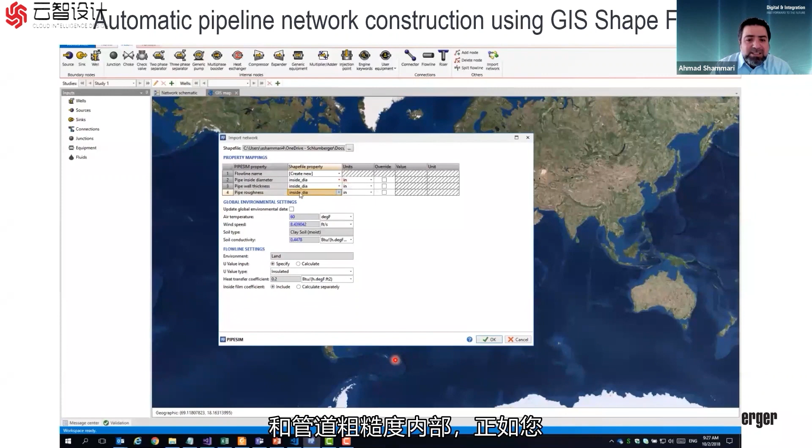So now it found that the shapefile has certain attributes, we call it. So we have pipe inside diameter, pipe wall thickness, and pipe roughness. So as you can see here, I need to override because the property is not available. So now what will happen is that it actually constructed my 2D network. And all these are new flow lines generated automatically from the shapefile.

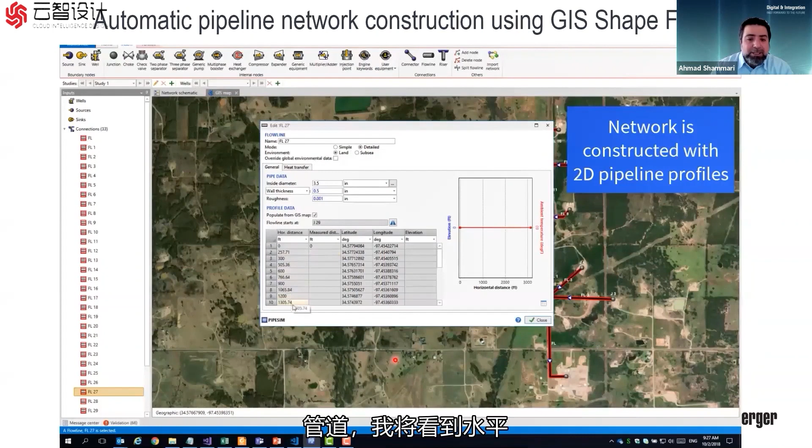If I double click on the pipeline, I will see the horizontal distance, the latitude and the longitude, but I'm still missing the measured distance and the elevation. How can I import that? How can I generate that? Well, I can simply go to capture elevation.

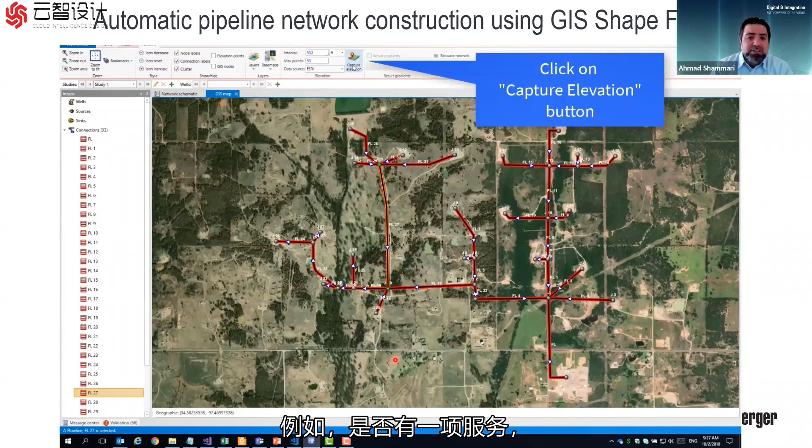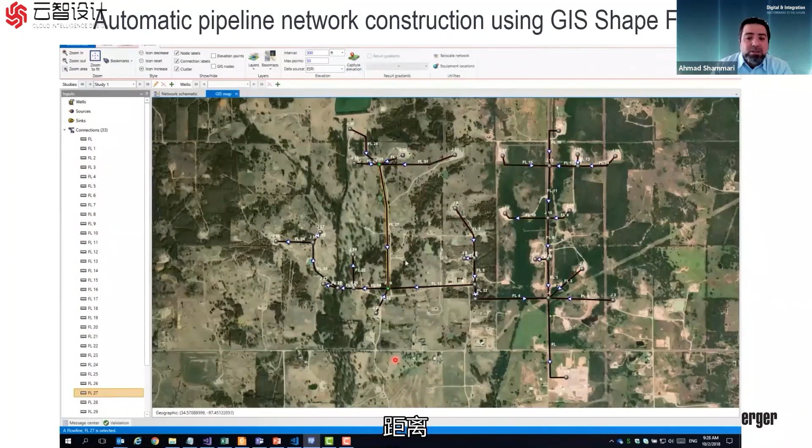So automatically, when I click on capture elevation, PipeSim will go to, for example, the Esri service. As you can see, data source is Esri, and it will find the pipeline profiles automatically from the internet. And this is free for all PipeSim users. Okay. As you can see here, now the elevation has been captured and also the distance. And all the red colors now are gone.

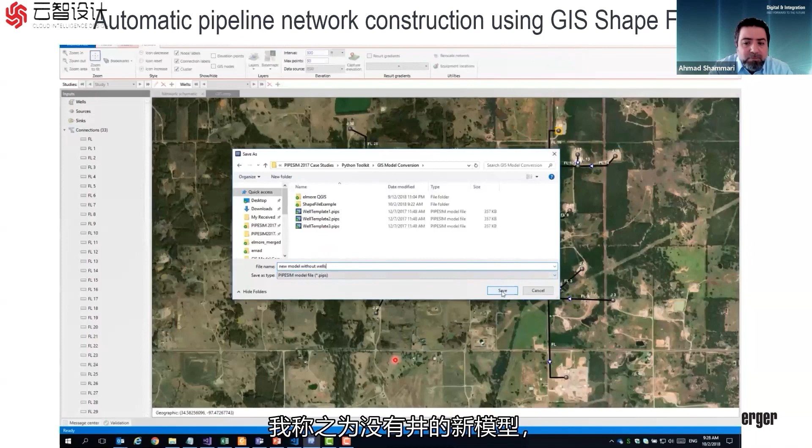However, pipelines are not connected to wells yet, right? Because the shapefile just has the start and the end of the pipelines. So now I'm going to save this network model, and I call it new model without wells. Okay. So now, as you can see here, I don't have wells. It's just pipelines. And now I have a network that contains only pipelines without wells.

Okay. Next, I will show you the magic now. I'm going to automatically build well models using Python script from Excel. And then I'm going also to update the network model that I just created. And at all the beginnings of the pipelines, I'm going to place wells there. And all that without touching the user interface. Okay, let me do that.

Sorry. Here we go. Sorry.

So we have already developed a Python script for this purpose. So I have a Python script that will build well models from data in Excel. Okay. This script is launched through PipeSim using PipeSim Python plugin in Excel. This is the data, okay?

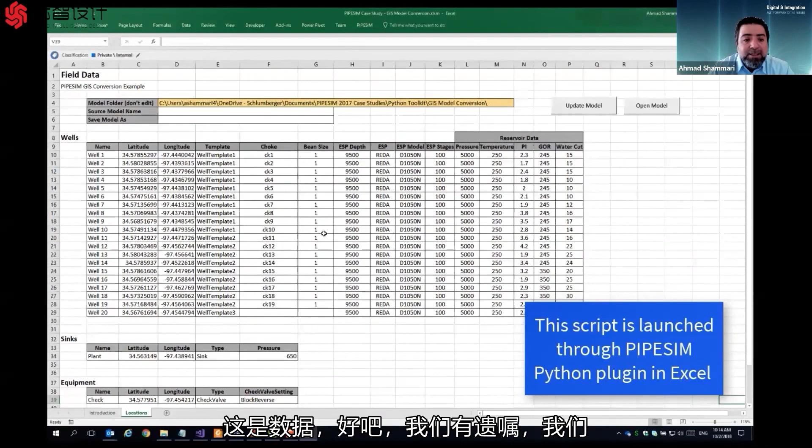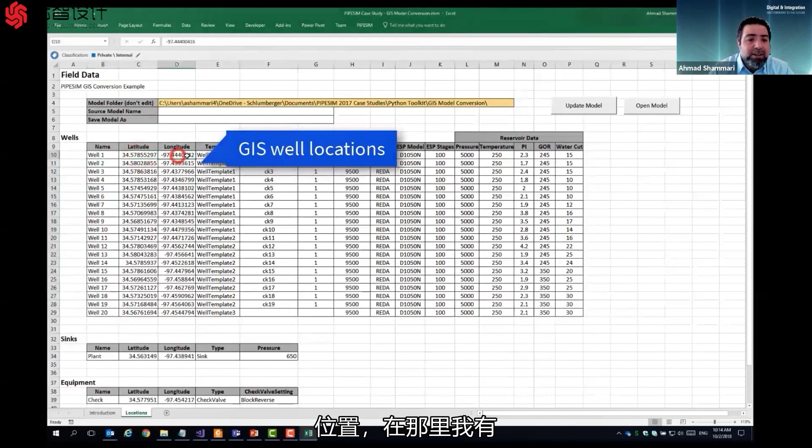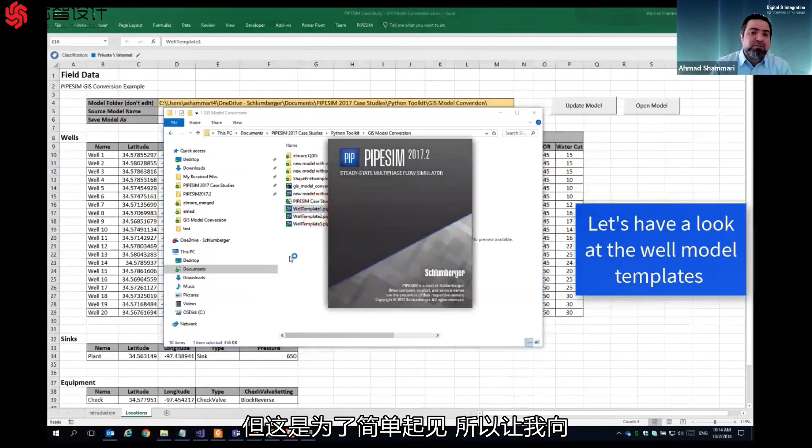We have 20 wells that I'm going to build from scratch. I'm going to place them in this GIS location where I have the latitude, the longitude. I will use well templates, starting with well templates, and I'm going to update the data. Of course, this is not necessary, but this is for simplicity. So let me just show you the template. This template has already some data, some casing, tubing, completion, etc.

So what I'm going to do is update each of the templates with data and then store it in the GIS location into my network model that I built in the previous slide. Okay. So I'm going to add electric submersible pumps. So these are the ESP properties.

I'm sorry, it's a bit. So yeah, let me just, 1 second.

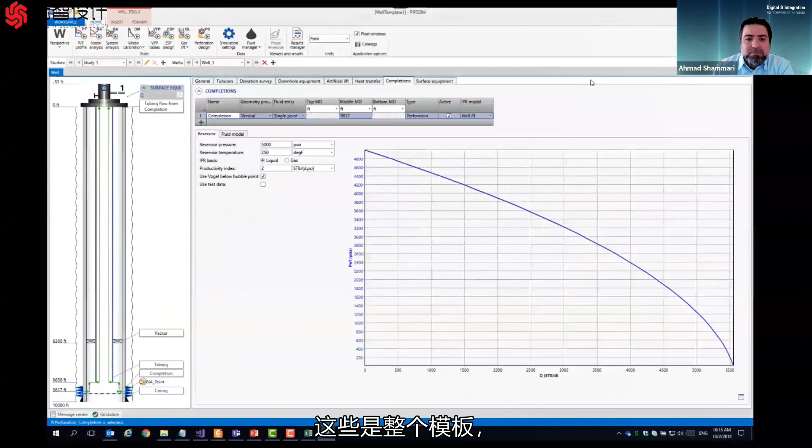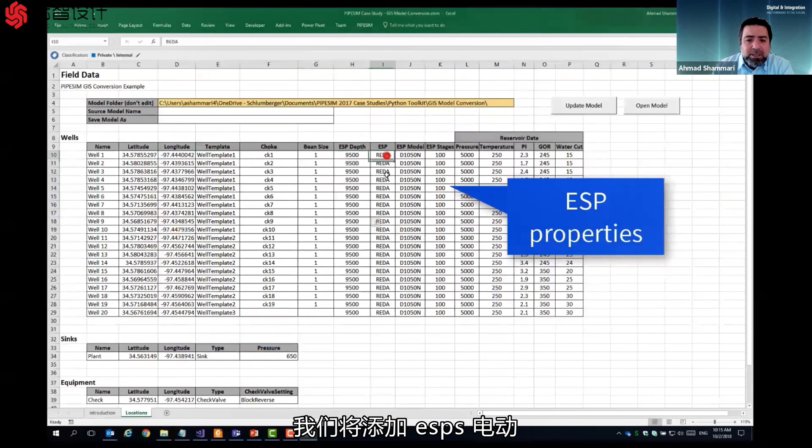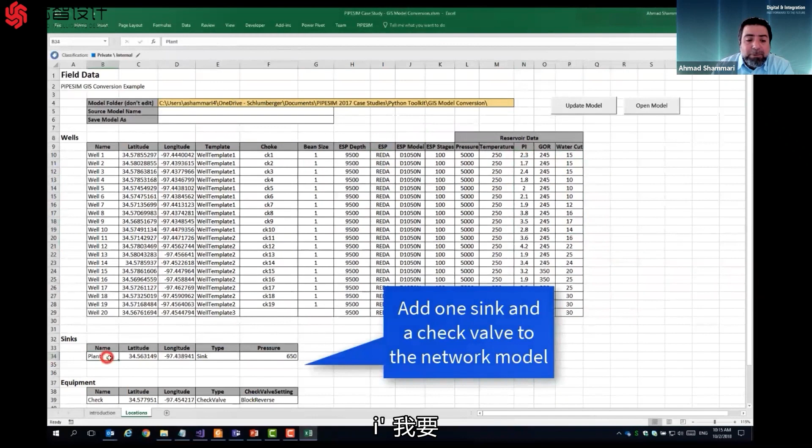So these are the well templates. And now we have 3 templates. We are going to add ESPs, electric submersible pumps. I'm going to change the phase ratio for the IPRs. I will keep the pressures. I'm going to add a plant as a sink in this location, and I'm going to add a check valve in this location. Now, let me just show you the script.

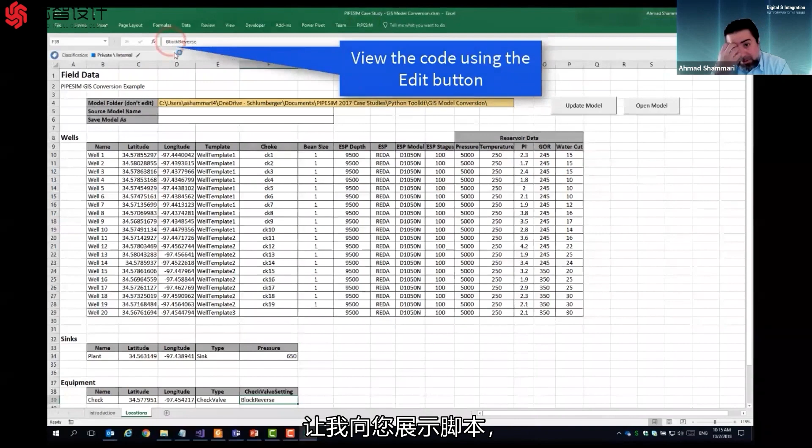So this is the script that is developed to build the models from scratch. Now, we are going to insert the original model name. So this is, as you remember, new model without wells. And then I'm going to save it in a new name. I'm going to call it with wells, okay? This is the saved model.

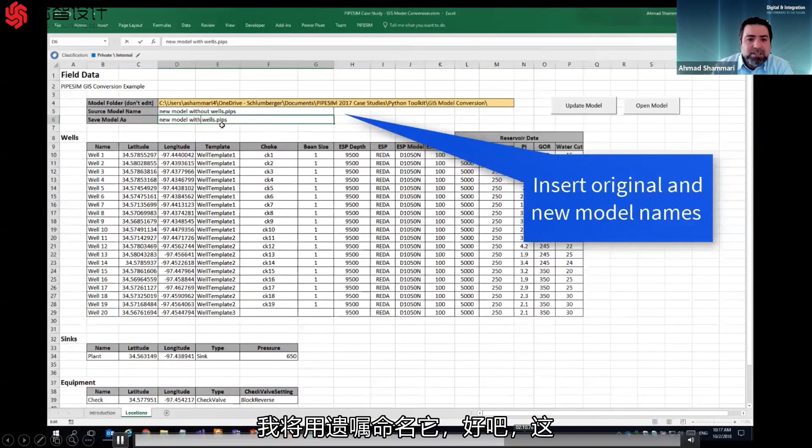And now I click on this button that will launch everything in the background. And after a few seconds, the new model is launched.

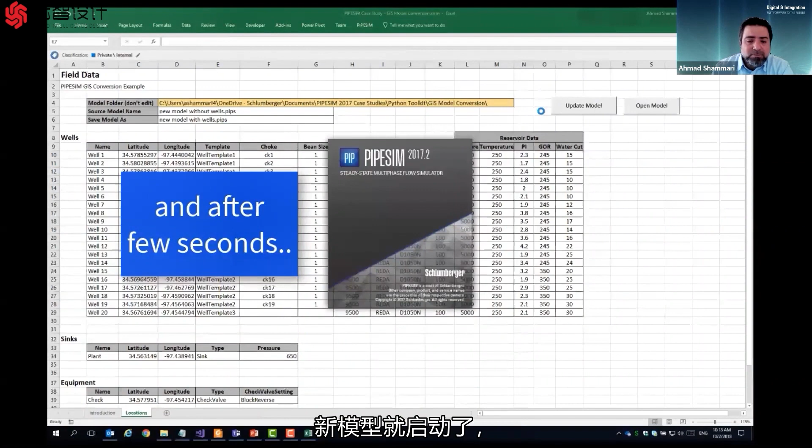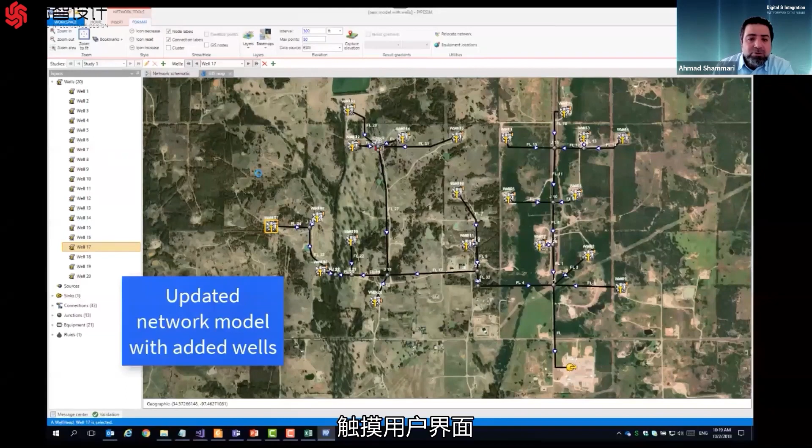And as you will see now, all the wells have been added automatically without me touching the user interface. All the data came from Excel, right? ESPs have been added. Each well is placed in the right location because I defined the UTM coordinates, the latitude and the longitude.

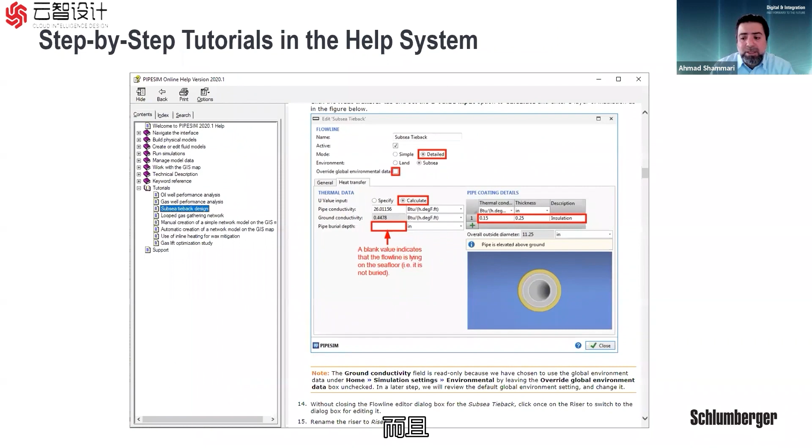So let me ask Nikhil and Charter, do we have time so that I can do a live demo, or that's it? Yes, sir, sure. We have a lot of time. You can go. Perfect. Okay. Before I go to the demo, anybody has a question? Do you want to type the question in the chat, or we can take live questions? What we can do, sir, if anyone has any question, they can raise their hand and we will unmute them and they can directly ask questions with you. Okay. So ladies and gentlemen, if you have a question, you can raise your hand through Zoom, and then we can take it. Otherwise, if you have no questions, I can launch PipeSim now.

Okay, Mr. Ali, you can go ahead. You can ask your question. Yeah, go ahead, please, Ali. Hi, thank you very much for this great presentation. I would like to know the sort of differences or similarities. I see now the similarities between this and the PETEX software. We have, from the PETEX package, Prosper, GAP. I see there are quite a lot of similarities. What would you say is the difference in PipeSim from those packages?

Sure. So number one, PipeSim has the GIS integration. Okay. I don't think it's right that I criticize or show any weakness of any other product for a competitor. Let me tell you the things that PipeSim has, and then you can find out yourself whether the other competitor has it or not. So number one, PipeSim has the GIS integration, where you can run models, you can look into the results gradient along the GIS. You can build networks automatically from the GIS and so on. So this is a very important feature.

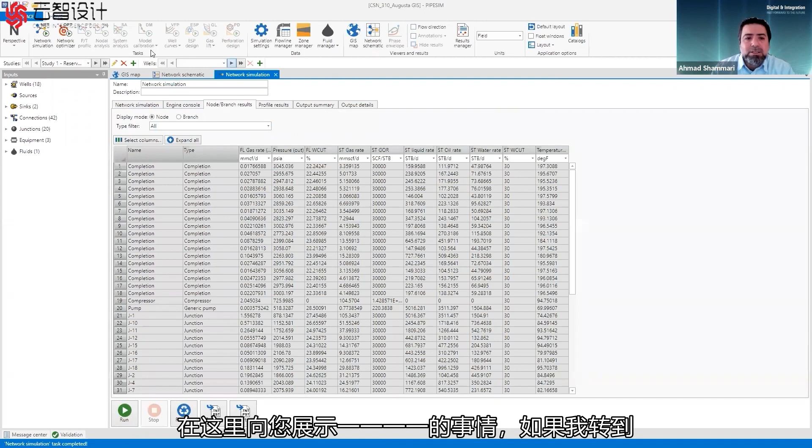We also have our PipeSim network optimizer, which is unique. So in the network simulator, let me just show you one thing here. If I go to the GIS map and then go to format, as you can see here, this is the results gradient. One more important thing that PipeSim is unique about is that the whole network is modeled in the same model. You don't have a separate software for the wells, another software for the network. So if you want to model a well, it's in the same model. You can double click on it right away, and it will open for you all the well simulation capabilities, literally everything.

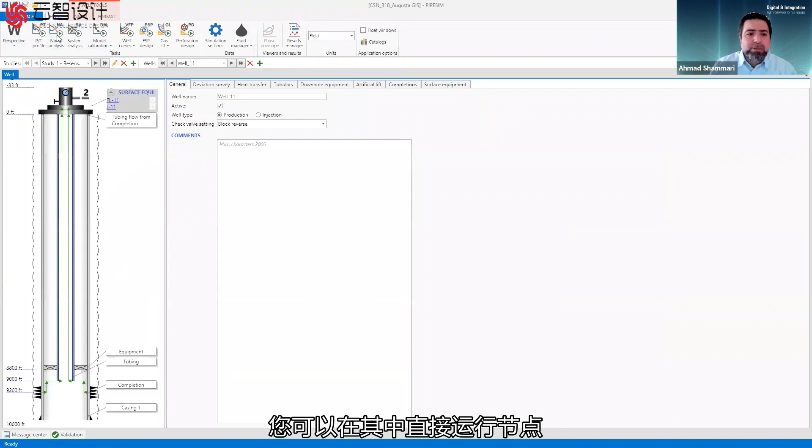So this is the well, and you can do all the simulation tasks in the well, right? You can switch from the home to the well perspective, and then the whole software will focus on wells, where you can run, for example, directly nodal analysis for the well, without actually affecting your network. So this is the nodal analysis for the well itself, although I am in the same network model.

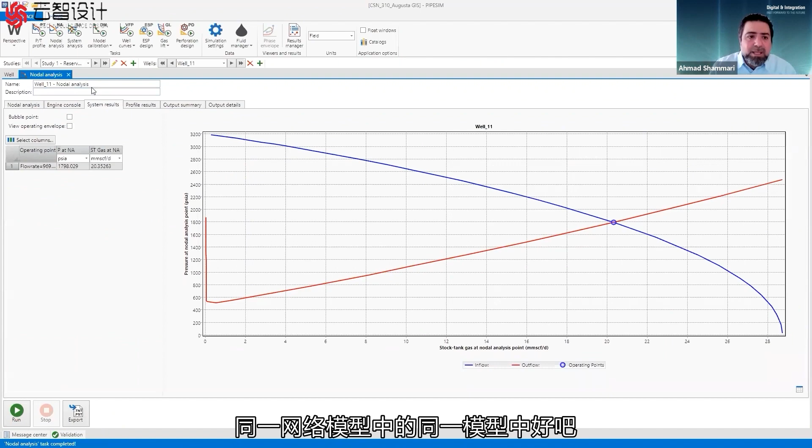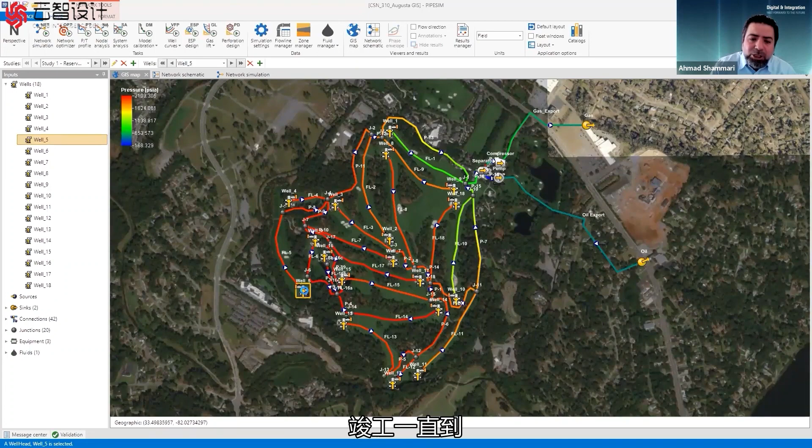In addition to this, when PipeSim solves the network, including the wells, PipeSim does not rely on VLP curves. You don't need to construct outflow curves where you put ranges of the water cut, the GOR, the rates, etc., because eventually the software needs to do interpolation. PipeSim network solver solves the whole network from the reservoir, from the completion, all the way to the separation facility. Everything in one model. So this is another unique feature.

And there are also others like the availability of the 64-bit version, PipeSim in the cloud under the DELFI environment, the ability, for example, to connect natively with Eclipse, which is Schlumberger's reservoir simulator, and others. So that's it. This is an open event, and I feel that my objective today is to show you PipeSim capabilities, and not compare it with any other product. I hope that's fine with you.

Yes, sir, definitely. I was not expecting you to compare it. Thank you very much. This is a very great capability you said, you don't generate the VLP curves to interpolate. That's very interesting. How would you solve the network here then? So that's the thing.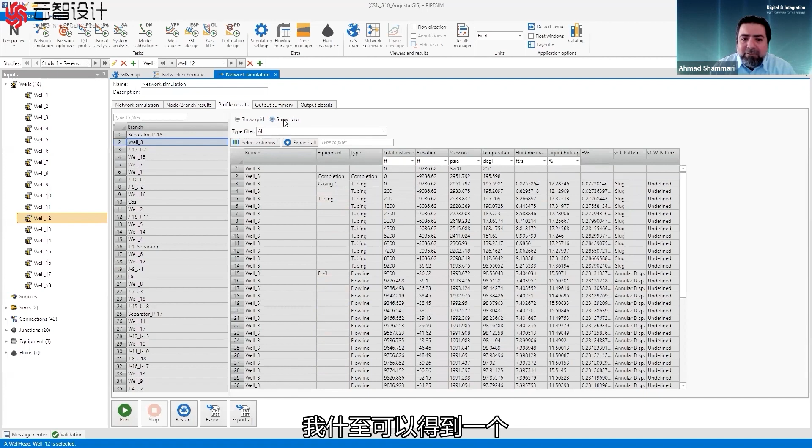So PIPESIM has a very powerful numerical solver in the background that will consider the flow path. Let me show you. So I now have run the network simulation, right? So now if I go to the network simulation, I have what we call the profile results. The profile results start from the well, all the way to the flow line, and I can even have a plot that will start from the reservoir along the tubing and then the flow line.

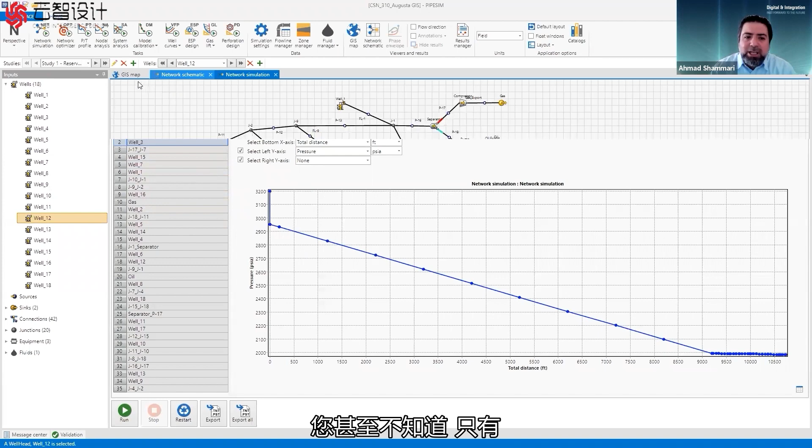Not only this, if you have, for example, certain flow lines, let me just show you one nice feature. So here I have the network schematic. So you don't only have the GIS canvas, you have also the network schematic. Now, what if I want to show the pressure profile along all this path, starting from this well? So we have well 4, and then we have this flow line P11, P12, P13, and then P16. Let me just show you again. Well 4, P11, P12, P13.

So I go to the simulation results. Let me just organize this. So I go to well 4. This is well 4. I hold the control button, and then let me just check the flow line. So this is between J4 and J2. I will hold the control button, click on it, and then I'm gonna continue. I will see J2 to J9. Here it is. And then I'm gonna also hold it until J9 to J1.

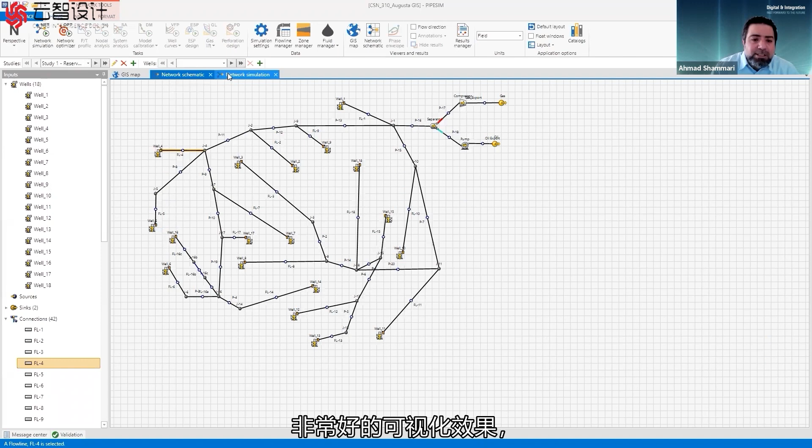So look what I have now. This is the pressure from the completion, from the reservoir in well 4, and you can follow the path. And then you can also compare that with all the wells that are connected to the same branch. For example, if you have well 5, then between J5 and J4, you can do that as well, and you can have a very nice visualization for well 5. Go here, and then you add well 5. So this is well 5 now, and as you can see, it is connected to the same flow line.

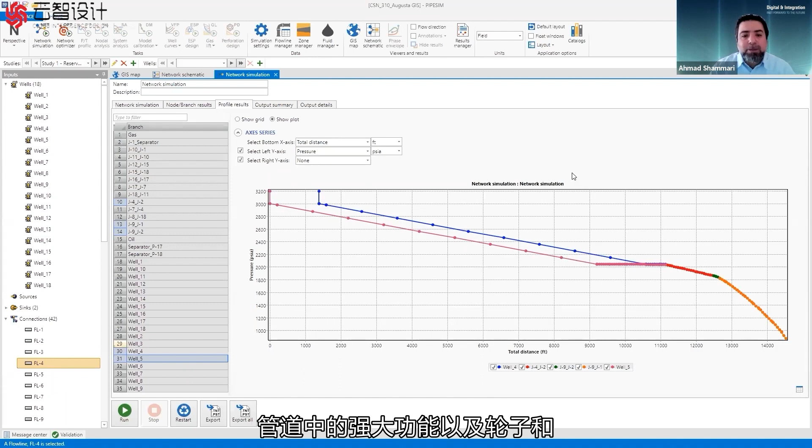So that's the beauty, the powerful feature in PIPESIM, where wells and pipeline networks are connected together. They're not separate. You don't need a separate software, or even a separate license, to construct your well models. Everything in one integrated model.

Yeah, great. I believe it's just the tip of the iceberg, but thank you very much for your answers. Absolutely. So, yes, another question. Yes, sir, we have one more speaker. Mr. Emmanuel, you can ask your question. I'm unmuting you.

Good evening. The question I want to ask is, in your nodal analysis, how can we have access to a demo of the software, to enable us as fresh graduates to follow along with the training?

So you know, the problem is that in Schlumberger, we have a commercial model where we sell software to companies. Having demo licenses for individuals is very difficult, because we cannot manage it. In each area we have what we call an account manager, who is responsible for providing all the licenses. Our license system is very restricted, and if we open it to individuals, it will be impossible to track. So unfortunately, this is not something that we can offer.

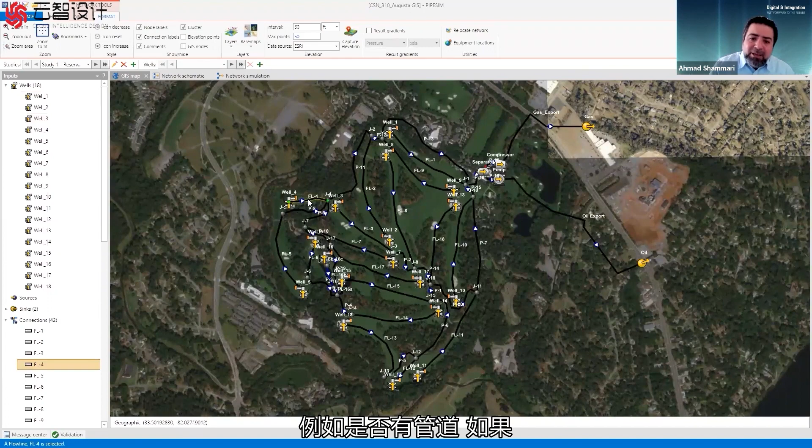So the objective of using both software is flow assurance. In any company, you will find what we call flow assurance specialists, who really need to look into not only the steady state conditions, but also the transients. Let me explain. For example, if there is this trunk line here, you zoom in. You have a well, and then this trunk line, and then you go to the field, and you find that if you go to the pressure gauge of this well, the pressure is changing.

All right, the production is oscillating, right? And then with time, you see that the production in this well is declining. PIPESIM cannot handle such a scenario. You really need to go into Olga, which is the transient simulator, and try to simulate what is happening. Maybe there is slugging, maybe the flow is a sluggish flow and it's oscillating, right? And then it could die eventually. Maybe there are pressure waves coming in the reservoir. So all these things that are related to production dynamics, you need Olga to do it.

Again, for example, if you want to design scraping, one of the pipeline management or pipeline integrity management practices is what we call pigging. So pigging is a device, an equipment that you insert within the pipeline, and then it will move along the pipeline and clean, sweep all the debris and so on from inside the pipeline. Olga will help you to design this pigging operation, the size, the timing, etc.

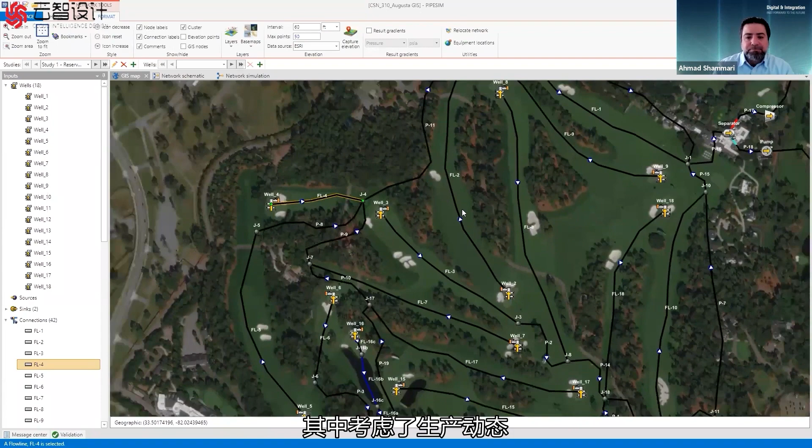My question is regarding the network simulation of the existing network. If some new wells are added, it may impact the existing wells, so there will be a reduction in the flow rates or production from the existing wells. Initially there was a production profile, and year-wise there are different flow rates. So how will PIPESIM be helpful in handling that situation?

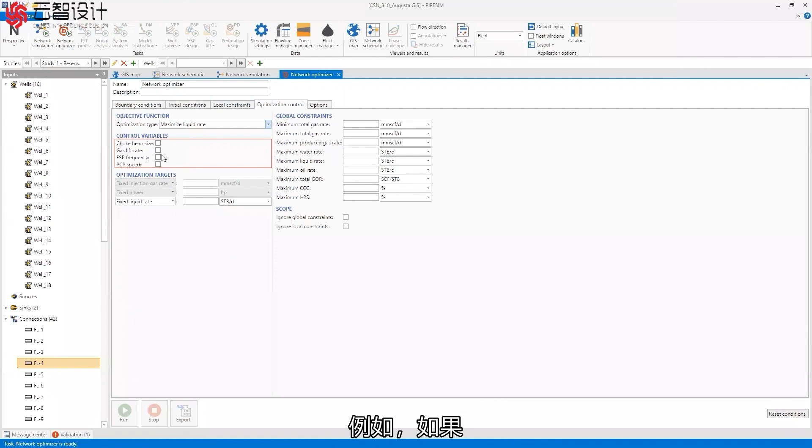That's a very good question, and I promise you that I will answer this question in detail two weeks from now, because there we are going to talk about network optimization. But I will show you a glimpse. We have a functionality called Network Optimizer. You click on it, and then in the network optimization, you can put your optimization control. You can maximize oil rate, maximize liquid rate, and then you need to define your control parameter: for example, choke bean size if it's a gas well, or if it's an oil well, the ESP frequency, PCP speed, gas lift rate.

And then you can put local constraints on the wells. For example, you can go to certain wells and define the maximum production per well. You can also go to the flow line level, and on the flow lines you can define the maximum liquid rate, etc. So all these are available to help you control your production in the network. And as I said, I'm going to show you that two weeks from now.

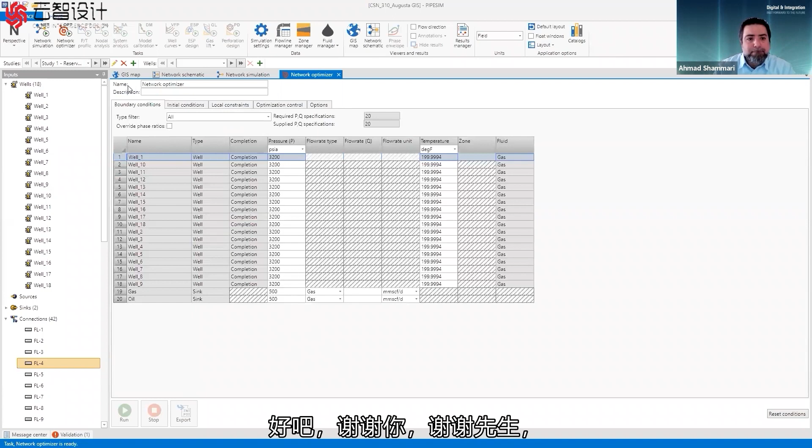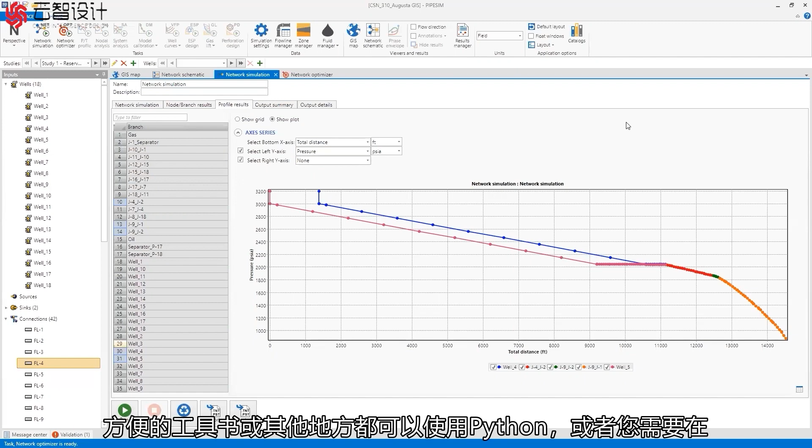Hi, good afternoon, sir. Very good presentation and a brief introduction to PIPESIM. I just wanted to know about the Python toolkit. Are all the scripts available with Python in any handy toolbook or somewhere, or do you need to develop them on your own? If you download PIPESIM, there will be a good number of examples. Let me show you.

So here, if you go to developer tools, then Python toolkit, then examples. There are tons of examples here, okay? For example, it can be as simple as open close. Double click on it. I'm using VS Code as an editor for my Python. So this is an example. It says model equals model open from case study, this one, okay?

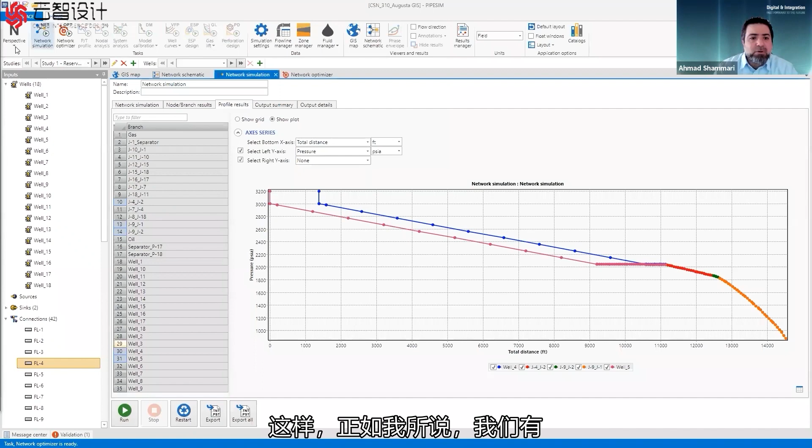Okay, so I think I'm almost there. So right now, as I said, we have two perspectives. We have the